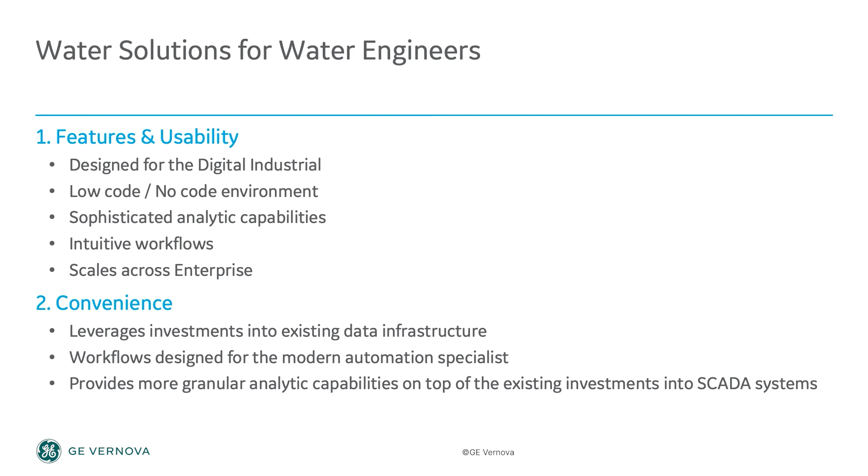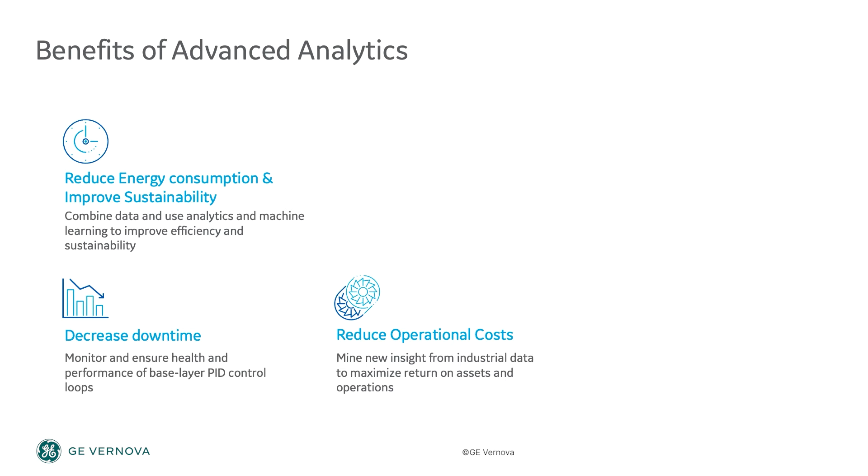Let me quickly step back to talk about the goal of advanced industrial analytics in the water space. Some say that goal is to reduce energy consumption, to be more sustainable, or to reduce operational cost. Some may think it's to eliminate unplanned downtime altogether, or to improve their maintenance practices. Others may say it's to maintain regulatory compliance, or it's all about optimizing chemical usage. The list goes on, and the fact is, they are all valid goals.

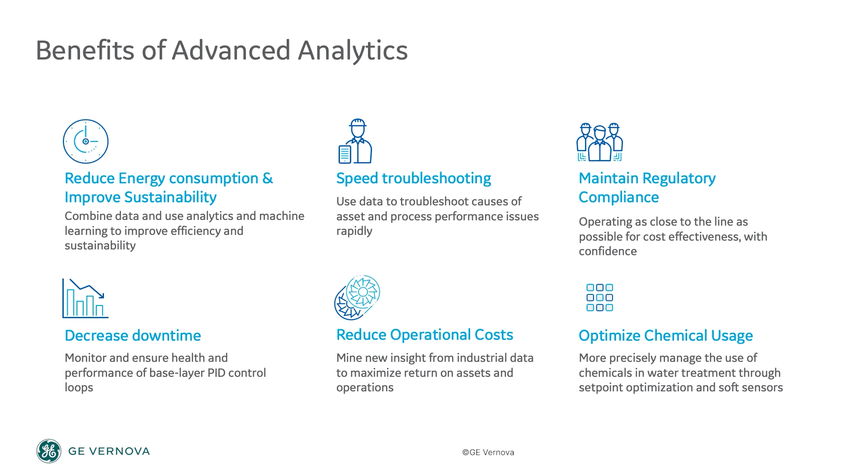But let's briefly move up to a 30,000-foot view and try to just explain what we see below us. We see water moving from place to place through a series of pumping operations, pumping between reservoirs and wells, pumping up to towers, pumping into rivers and lakes. Those pumping operations can be delayed due to things like water treatment or compliancy issues.

The processes can be run excessively and end up generating too much water that ends up getting purged in the end. Similarly, those processes can come to a standstill under certain conditions, like equipment failures. Whatever the reason, if you are pumping too much or not enough, or if your water ends up being out of spec, you are simply missing your target.

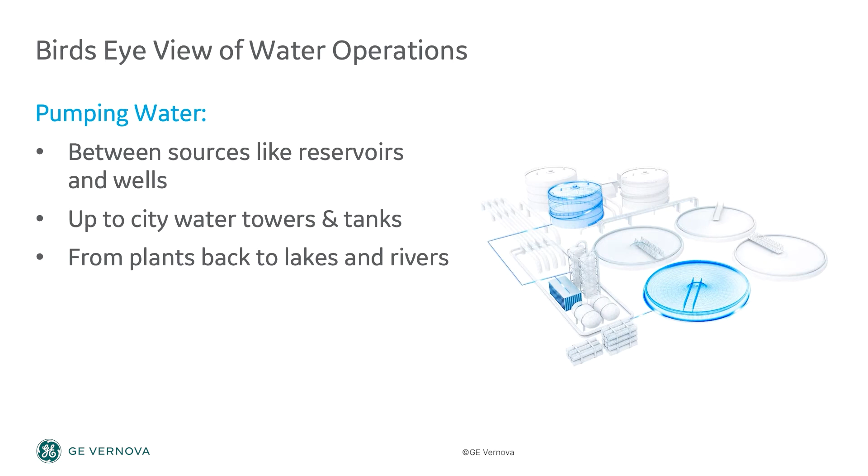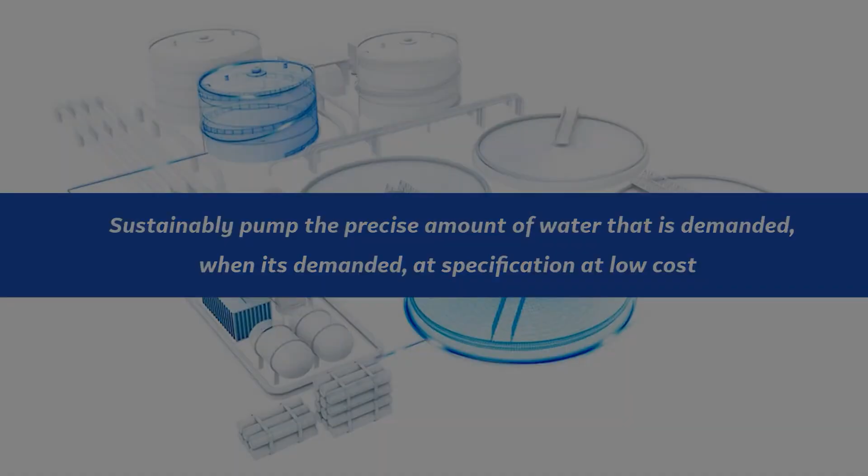With this simplified view, we can restate our goal, which is to sustainably pump the precise amount of water that is demanded when it's demanded and at specification, while maintaining the lowest possible operational cost. Now that we have established the goal, we are finally ready to tell you our story about how GE Digital is helping our West Coast water customer achieve their goals, starting with a pump failure prediction analytic that can detect catastrophic failure up to 16 days in advance.

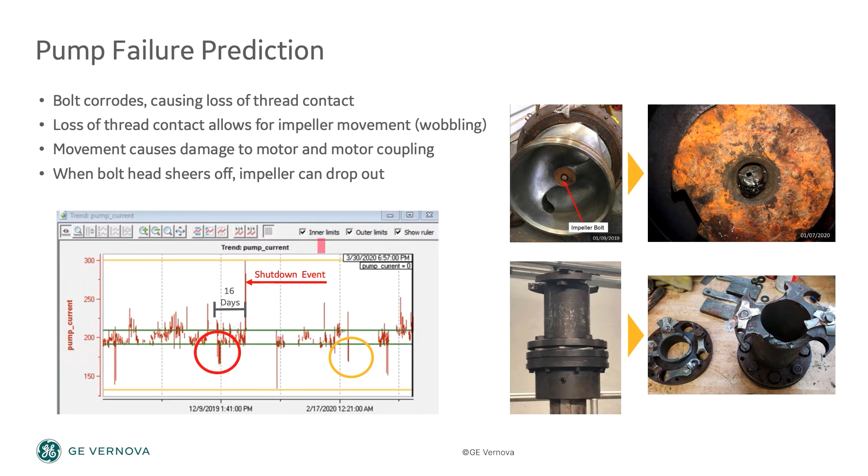Our story starts at a point of frustration with the inability to find the solution that's hidden within the mountains of chaotic sensor, maintenance, and LIMS data. Tasks that should be simple, like accurately reporting failures, finding efficiency trends, and correlating those with other activities, turn out to take months to accomplish using tools like Excel or custom coding. Even worse, the insights that are gained are nearly impossible to act upon because the deeper level analysis that's required would take far too long to accomplish.

Things like poorly described problem statements, lack of success criteria, no clear path to ROI, all contribute to unsuccessful analytic initiatives of the past. And at this point, the customer has become frustrated with funding long, drawn-out proof of concepts that end up going nowhere. That's why off-the-shelf CSense solutions for the water industry are designed with a clear path to ROI. They can be delivered with speed and efficiency for quick wins, giving the customer the confidence they need to continue their analytic journey with success.

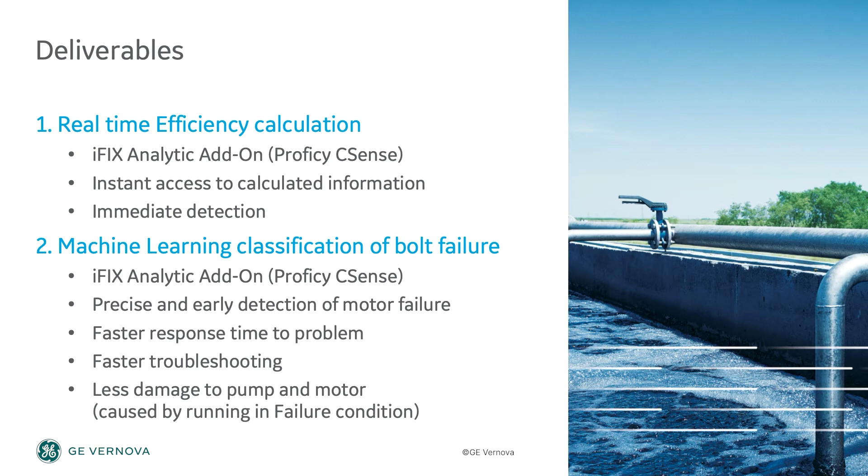With this customer, we started our analytic journey with two CSense solutions: real-time efficiency with statistics and machine learning classification of pump failure, which can be applied against a number of failures, but in this case, it's applied against a pump impeller bolt failure. So let's take a closer look at the challenges. These are very large Class 3 sewage pumps with internal corrosion problems that can result in major equipment failure. They also run below the OEM efficiency specifications.

Corrosion problems tend to manifest around the impeller bolt. As the bolt corrodes and becomes compromised, the thread contact between the impeller bolt and the motor shaft degrades, allowing the impeller to have some wiggle room to move around. When the pump experiences a vibration event caused by some unexpected foreign material in the flow, the already corroded bolt head can snap off. And when that bolt head breaks, further damage to the pump and to the motor above can occur.

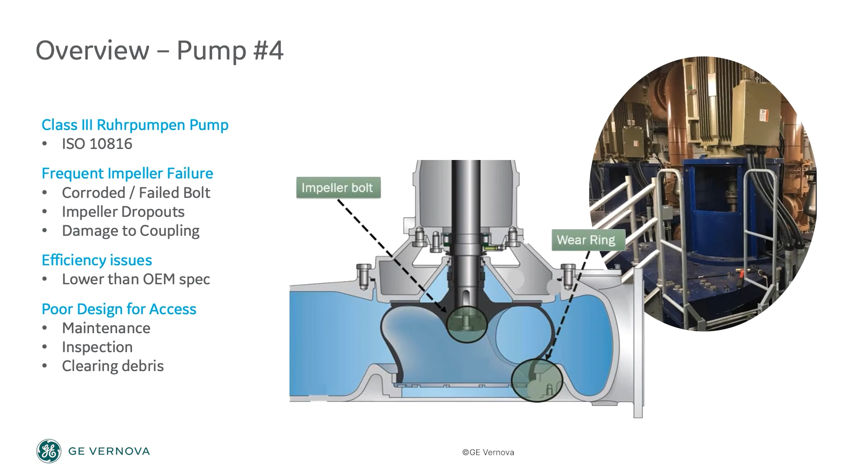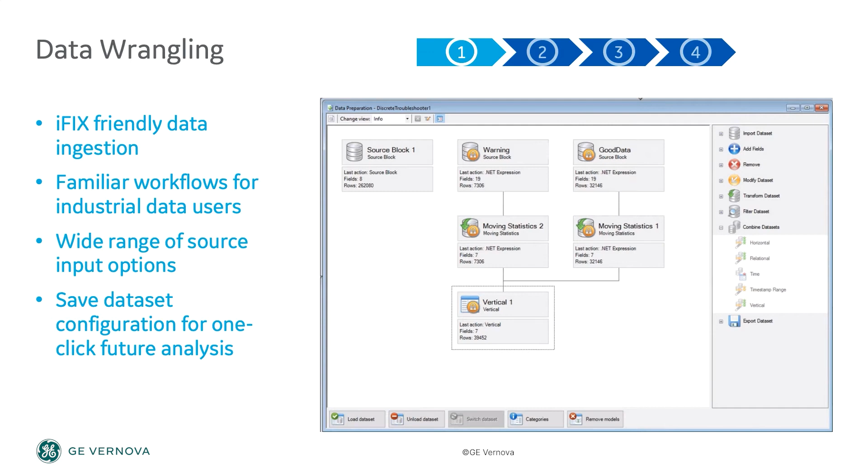With absolutely no code, we connected directly into the historical SCADA data stored in their site historians, and additionally pulled in maintenance records from text formats to quickly generate a combined data set in the applied solution. Once the data was pulled in, we were able to use the feature-rich set of tools in the solution to quickly draw out new insights.

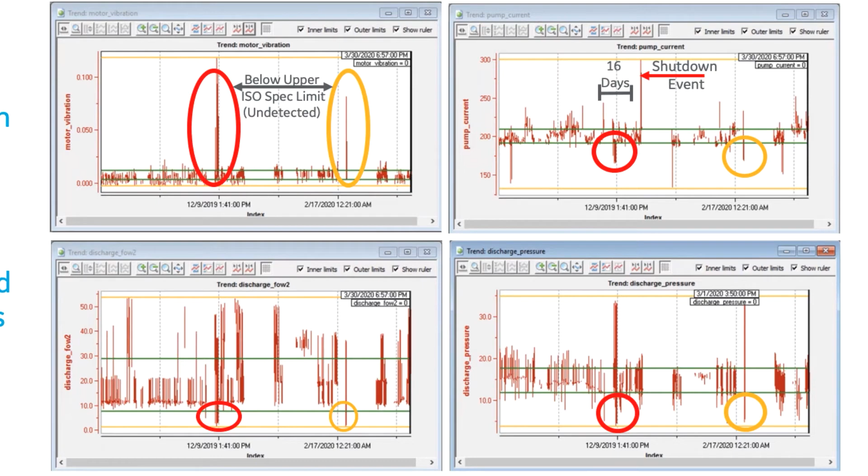For example, we found 2 instances of higher than average vibration that appeared to correlate with smaller spikes of data with other tags, such as PSI, flow, or current. Interestingly, this spike in vibration had gone completely undetected in the SCADA alarms because it's actually orders of magnitude below the operating limit.

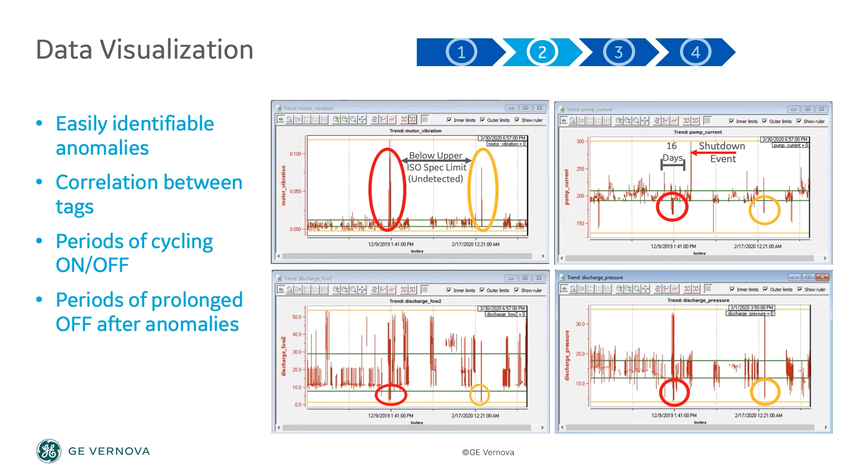Now, if it were detected when it had occurred, and if the team had taken proper action to stop the pump and simply repair the bolt, had they known about it, they would have been back up and running within a day. Instead, the pump continued to run for 16 days, wreaking havoc on the motor above, ultimately causing that catastrophic shutdown event that took the pump offline for months.

The very next step in this analytic process was to visually determine if the data was ready to be used for training the machine learning model. Using additional tools in the solution to mark the failure mode data, we immediately realized that we did not have that good separation needed between the normal data and what we had marked as the failure data. This would confuse the pump failure algorithm.

So we took a step to quickly process the data by passing it through a moving average block, and the result was a much cleaner data set that the algorithm would understand much better. Still, to this point, we have not written a single line of code.

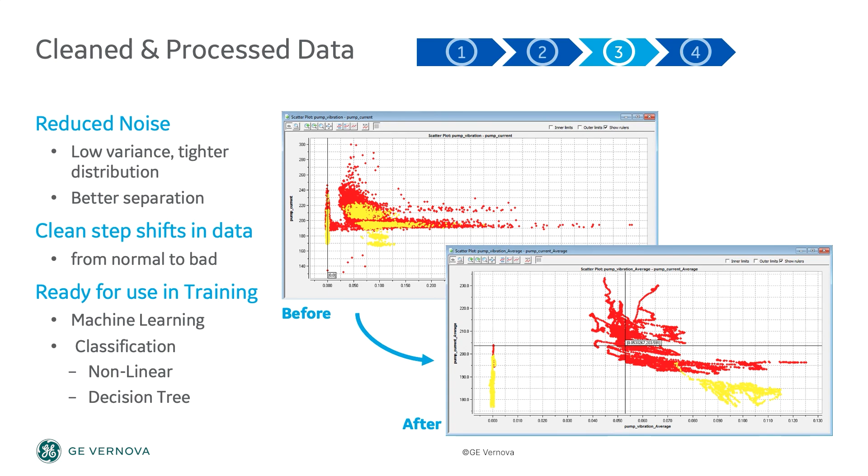One of the final steps in this process was to reduce the complexity of the entire algorithm by finding the minimum number of historian tags required to actually predict the failure. Using principal components analysis, or PCA, we found the right tags to use and the right number of tags. But we also gained a new insight.

We learned that the failure data, painted here in yellow, was not the same failure mode repeating twice, but in fact was a completely separate failure mode altogether. After exploring these findings with the team, we concluded that sometimes when the impeller bolt snaps, it's possible for the impeller to fall to the bottom of the cavity rather than staying attached. So now we'll be able to accurately detect both of these failure modes.

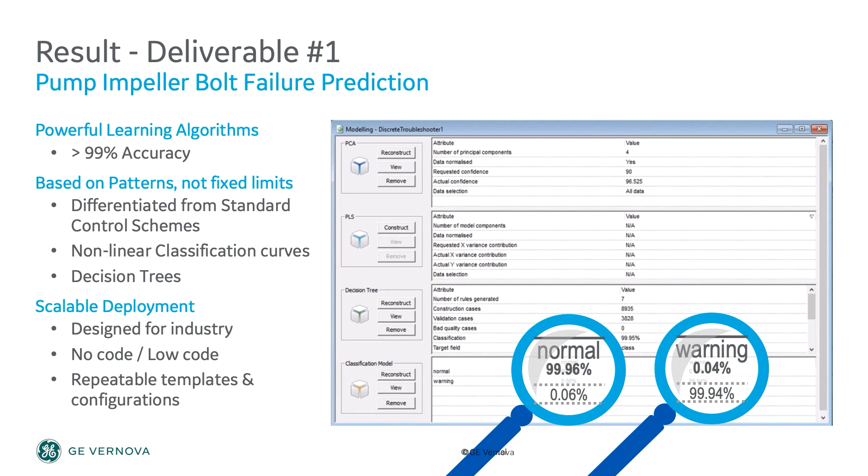All those processed inputs were then used to train off-the-shelf classification machine learning models, resulting in excellent accuracy for the training data, giving us the go-ahead for implementation into production. And using that exact same solution infrastructure, we were able to quickly plug in the real-time pump efficiency solution, giving the customer much better insight and control over the sustainability and cost reduction efforts that they have internally.